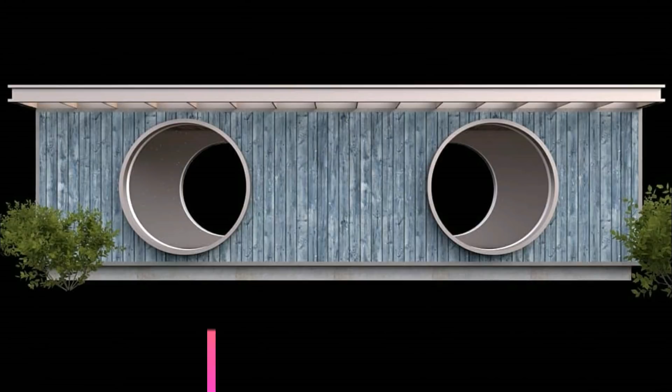So the first person that I'm giving my feedback on is Matt, because he always sends me his project, so thank you Matt, that's why you're number one.

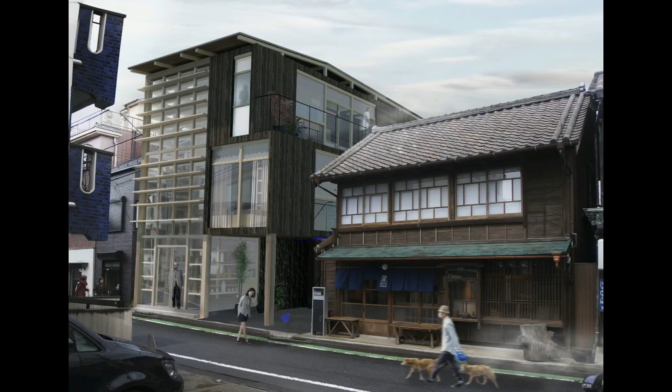The second one is by Peter. I like your image as well. It's realistic and you can see there's a lot of detail and hard work on this render. One thing is, I think it's a little flat. You could have added a bit more shadow into certain places and made it pop a little bit more.

Also the composition, because as a person that's never seen your project, I don't really know what you're trying to show. I feel like it's the building on the left because of its design, and also that the people are walking towards it or that there are people inside. It should have just been a focal point in your render.

Also the balconies on the left, they kind of look out of proportion or perspective. And also the car, I just wish that there wasn't a car. Without the car, it gives the effect that I think you're trying to show with this render. But overall, impressive - your attention to detail, the little fog and atmosphere, is good, well done.

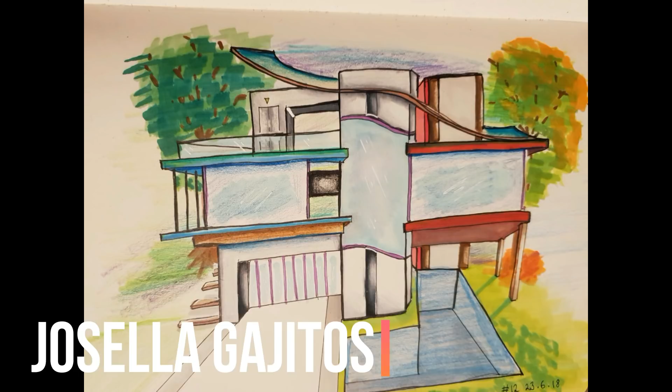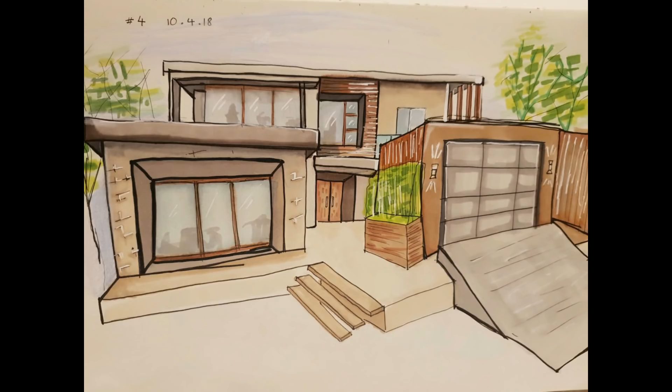So the next few images and sketches are by Josella, and these are nice. I think you did a good job since you've only started in March, so I think everybody should give you a big round of applause. First of all, I can promise you that your sketches are better than some of the people in my university. They are honestly that good.

There's two things that I think you should maybe try. The first thing is you could look at videos on rendering trees, or maybe on Pinterest, because trees and grass give the biggest effect to your sketches. The next thing is your lines.

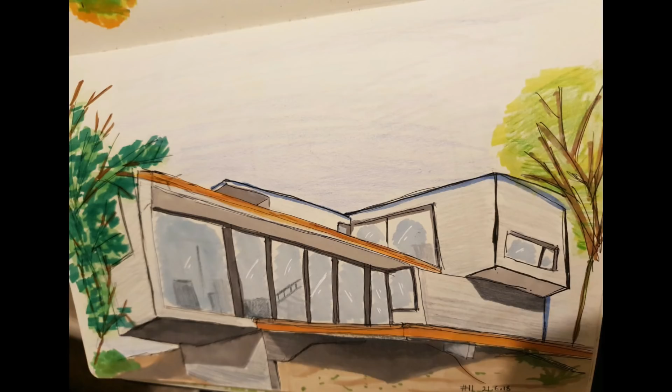Since you've started in March, you're probably not that confident to draw one straight line. So what I would suggest is that you actually use a ruler, because there's no shame in using rulers. I love using rulers and I always use them in my sketches. But to make it look like a sketch, you need to cross the edges and make them overlap a little bit. Don't take your time with the ruler, just be really quick.

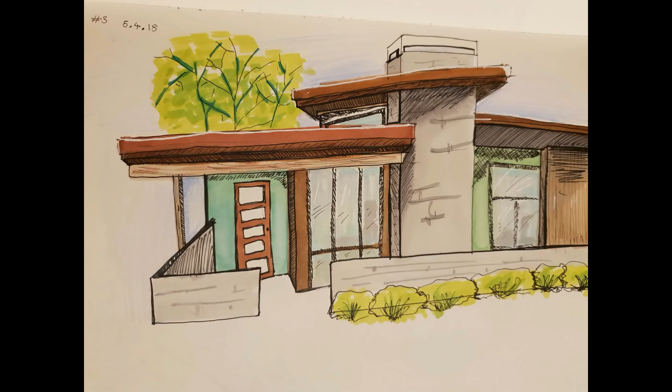Draw out your lines, because it really makes your overall image much cleaner, nicer, and much more appealing to the eye. That's one thing. The second thing is, if you don't want to use a ruler, that's okay as well, but maybe don't try to make your lines straight. On purpose, make them a little bit more scribbly. It adds character. So either ruler or scribbly lines, or combine both, which is what I do. But overall, really good sketches. Well done.

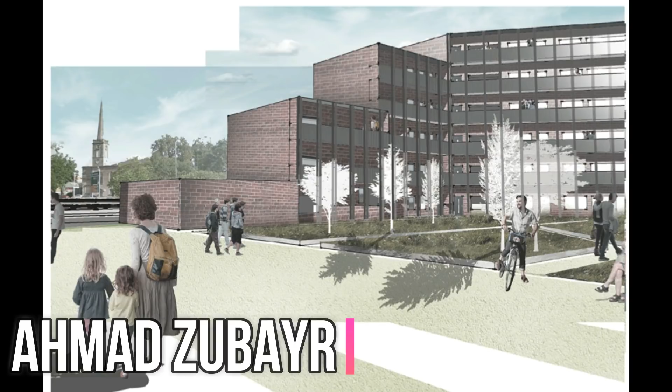So this one, I like the building and the project, and I love the collage style to it. The one thing is, I think you didn't do the shadow from the tree properly because they're not really to perspective, and you didn't add shadows to people. It just makes everything a bit more realistic.

Also some of the shadows, I wish they were a bit darker, because it would make everything pop a little bit, as the building in the back looks a little flat. And as you can see, some trees were added to the back layer, so you can see some of the lines that you did. But overall, really nice image.

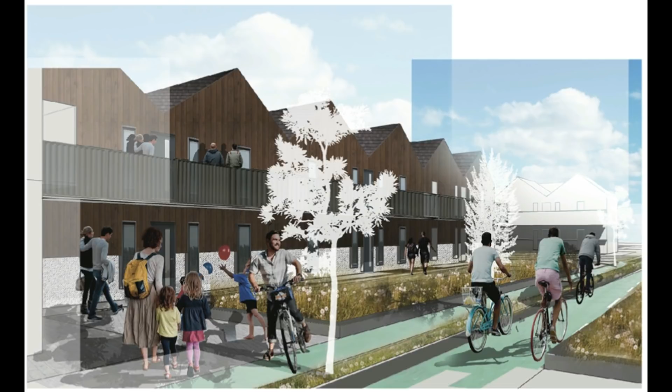The second one, this one is actually my favorite. As you can see, the colors, the texture, the trees, the shadows are very well done, and you can immediately see the effect from this one to the other image. It just makes it a bit more impactful and it catches your eye. It's really my favorite.

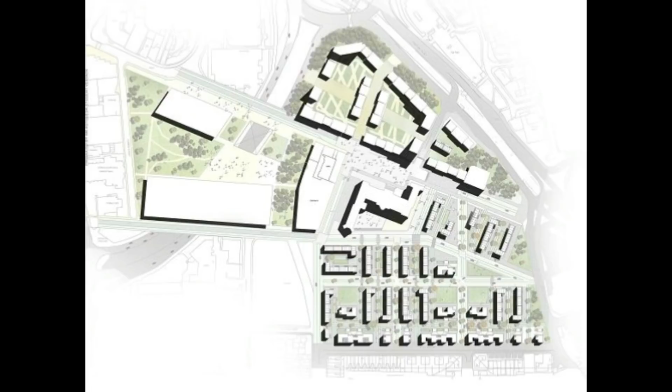The last one is the site plan. One thing I would say is that I feel like it's zoomed out. I would love to see the trees bigger, the buildings bigger, so I can see all of the details that you've obviously put into your work. But I know that you have some buildings on the left, and I think maybe you had to include it in your project.

Maybe they were a part of a renovation or something. So maybe what you could have done is you could have had that one smaller and then made a bigger one, focusing only on the right side, because I feel like that has a bit more detail and a lot more interest. But overall, really good.

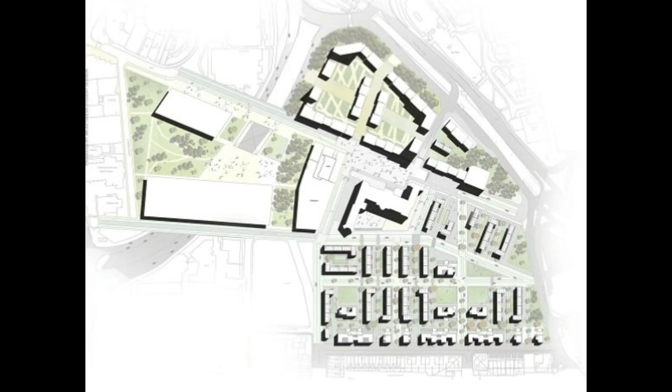So the next render is by Greta, and she actually redone one of my renders, which I am so happy to see that someone has actually redone one of my renders. You are the first person, so thank you so much, Greta, from the bottom of my heart.

I honestly like it. I think you've done it very well. What I like is that you didn't do exactly as I did. You took your own spin on it and you found your own images, so I think that's good.

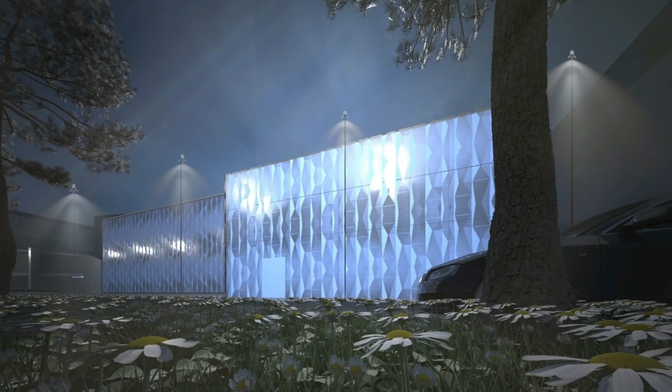I feel like it's a bit too dark and there's not really atmosphere to it or depth of field, and I wish the angle wasn't too low. And I feel like you've taken the render of a rendering program, which is good.

There's nothing wrong with it. If you had taken it to Photoshop and added a bit more effects and just played around with the levels and stuff, I think you would have had a nice project, a nice render.

And also the car, there's not really a lot of people, in fact there isn't any, and there's only a very big car, so maybe remove that car and add more people in it as well. Maybe add a bit more detail into the building. It looks a little flat and not really 3D, so maybe add a bit of dimension into it.

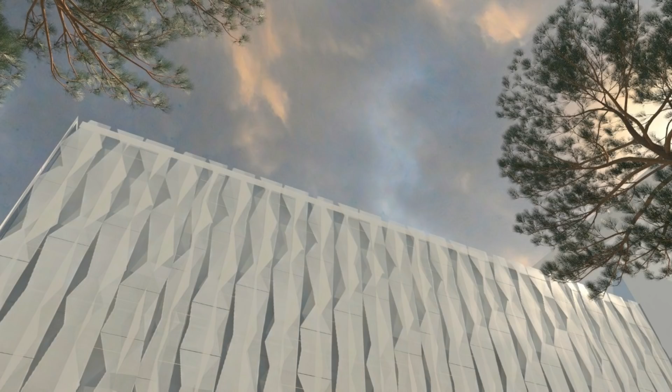But overall, I really like the design, and blue is my favorite color, so you nailed it. You can see the sky, it's much better. There's a little light, a little bit of atmosphere, and I also like the building. There's a bit more dimension into it, but like I said, maybe spend a bit more time on the building itself as well and just add a bit more detail into it.

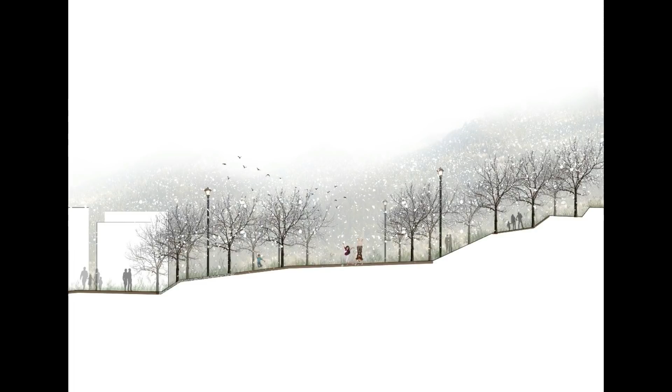But overall, well done. So I'm not gonna give any feedback into these sections. I love them, they're really fun to look at. And also these tiny little diagrams, one tiny thing is I find the text a little hard to read.

Maybe make it bigger or make it bolder. Maybe you can add a texture of rocks or soil.

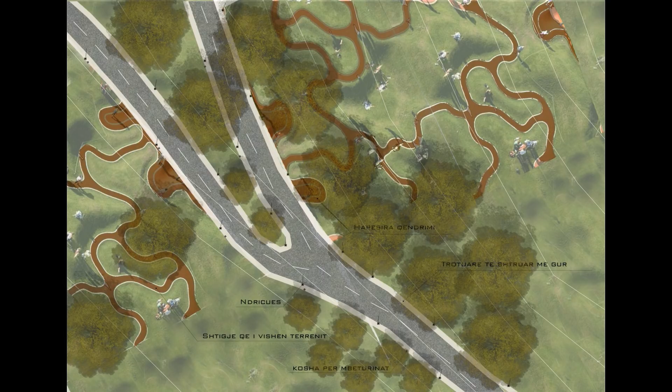This one, I wouldn't say that this is as artistic as the first one, but I do find it more readable than the other one, because I can understand that this is the road, the trees, and the pathways and the text.

Although I do prefer the other one in its textures and trees. They were a bit more vibrant. This one feels a little bit muted.

Overall, your whole images that you've sent me are really good, so give yourself a pat on the back.

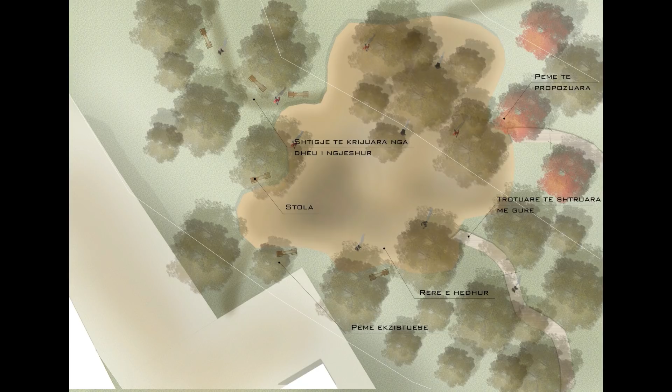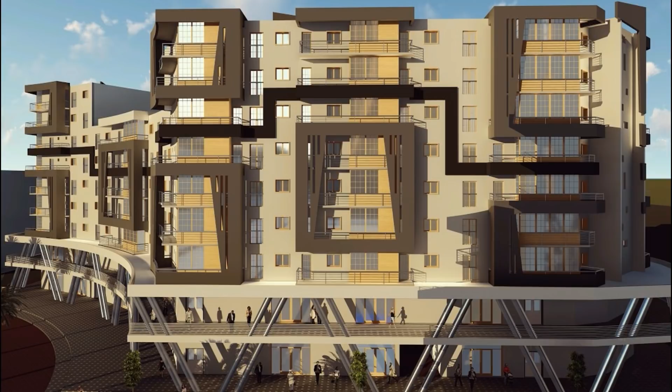So the next one is by Orholla. I am so sorry if I'm pronouncing your name incorrectly, which I think I am. Anyway, your renders are amazing, honestly they are so professional.

I'm not going to go into detail over all of them, but I would say that maybe if you had taken them also to Photoshop and played around with the levels, saturation, added a few effects or depth of field, it honestly would have killed it. Maybe some light features as well.

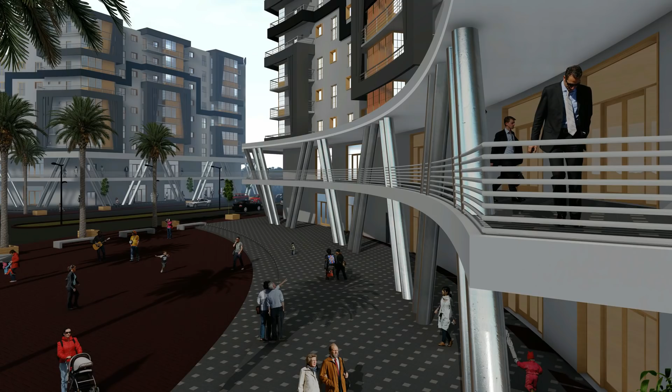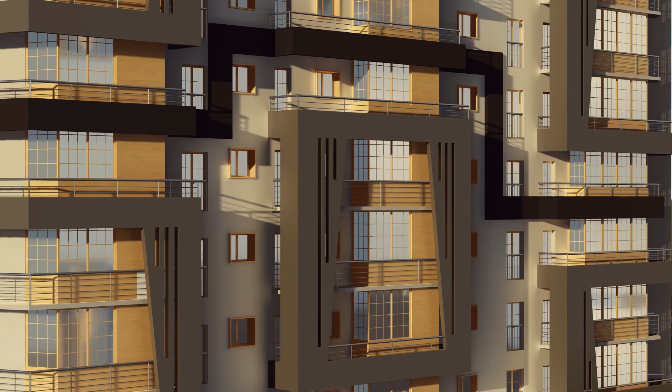Also, in some images, some places were a bit too dark, like the floor, so maybe make those a bit lighter, and then the shadows that are on the building make a bit darker so it stands out more. To take them to the next level, maybe add some people to add scale, and also some light on the interior, like I said, light features. If you had taken it to Photoshop, added some light effects and all that, it would have been very well presented.

One is a SketchUp model by Inzemam, I think. Same as the other project, there's a lot of work gone into this model. I can see that you spent a lot of time working on this project, so well done on that.

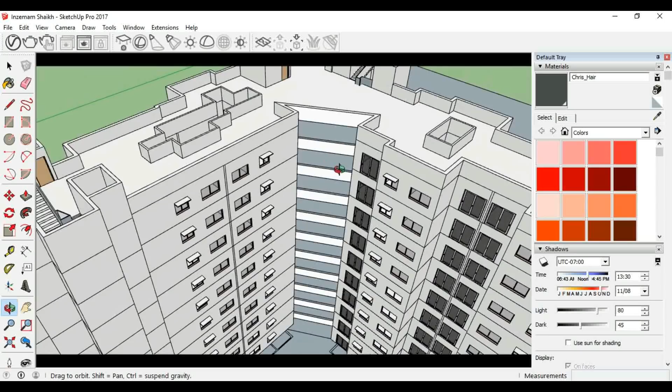The only few things that I'd say is maybe add some balconies, because I can see that you've created an urban space in the middle within all of the buildings. So maybe if you added some balconies to enjoy the view, I think that would have been very good. And I think your SketchUp model isn't finished because there isn't any materials or finishes on it, so I'm not going to critique on that.

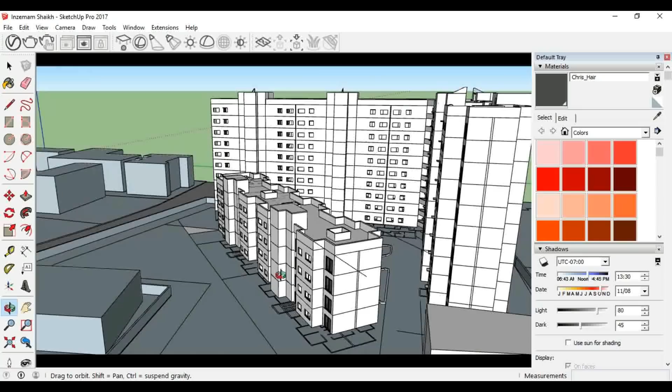Kind of an awkward corner - I feel like you could have done this a bit better, because you can see there's 2 triangles forming. Maybe instead of forming those triangles, just connect it into one straight line. That would have been easier.

For the stairs, I feel like if they were glass, it would just make it visually interesting for the people from the inside and also from the outside.

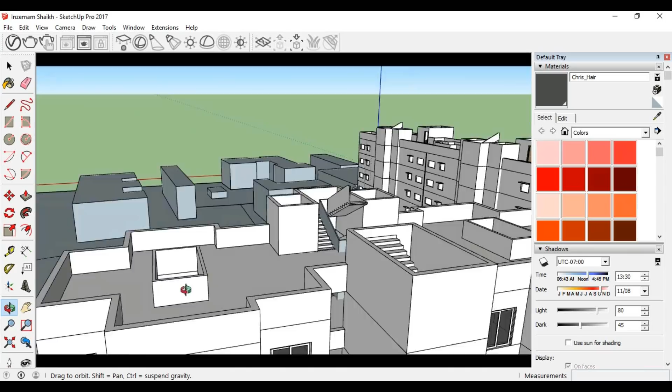And also maybe this urban space in the middle, you could have designed it a bit better, because it's in the form of a triangle, so it gives off so many great ideas, inspirations, and creative ideas in my head of how the space could look like. So you could work on that space a little bit better, because I feel like that could truly be the essence or something really nice in your project.

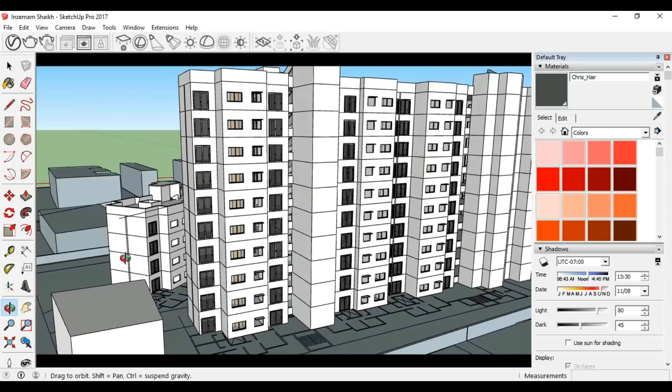So this one is very nice and professional. I just think it needs a bit of refinement in the design. For example, I think you could have used the spaces more efficiently - there's a lot of empty spaces and empty walls.